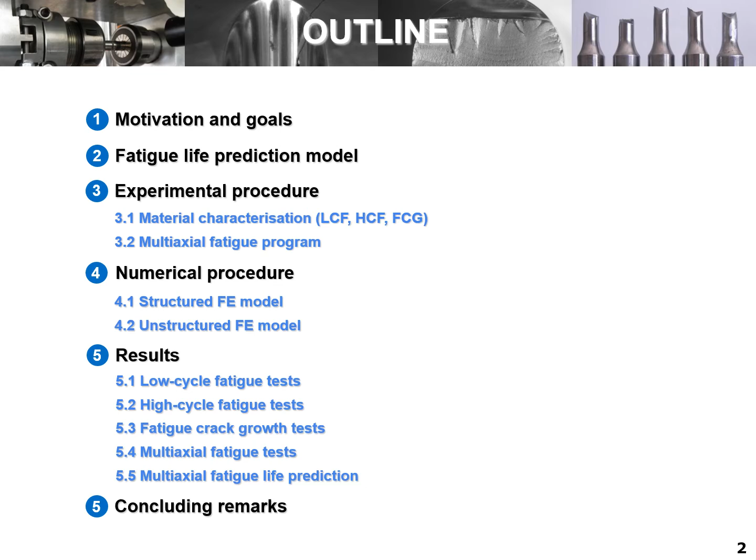Additive manufacturing has received a great deal of attention over the last years because it can meet the current demands of modern industry, in particular the possibility of creating three-dimensional objects directly from digital files, or the geometric freedom, among others. Within this group of techniques, selective laser melting is currently one of the most popular processes and has been successfully used in different sectors, namely aerospace, automotive, biomedical, and mold industries.

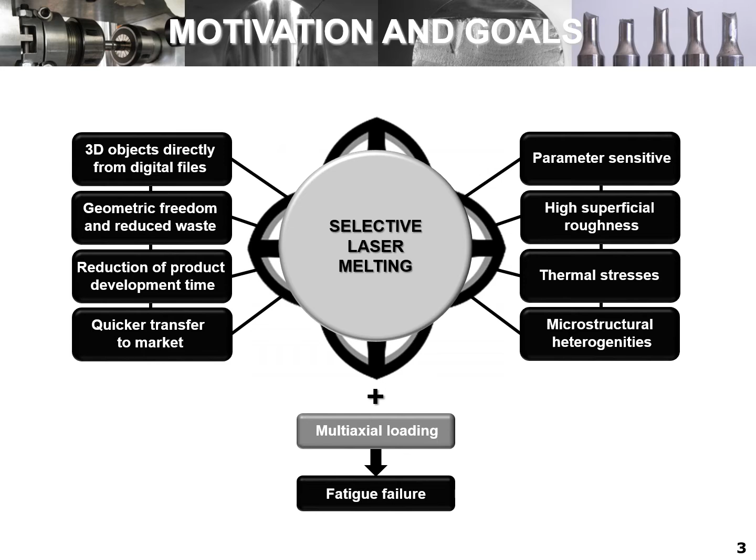Nevertheless, this technique is rather complex. Products are parameter sensitive and are very prone to microstructural heterogeneities, such as unmelted particles, cavities, pores, contaminations, etc. In the presence of cyclic loading, in some cases with a multiaxial nature, the SLM parts are susceptible to fatigue failure.

Briefly, multiaxial fatigue models can be organized into stress-based, strain-based, and energy-based approaches. Regarding the notch effect, it is generally accounted for using the theory of critical distances, the strain energy density concept, or fracture mechanics.

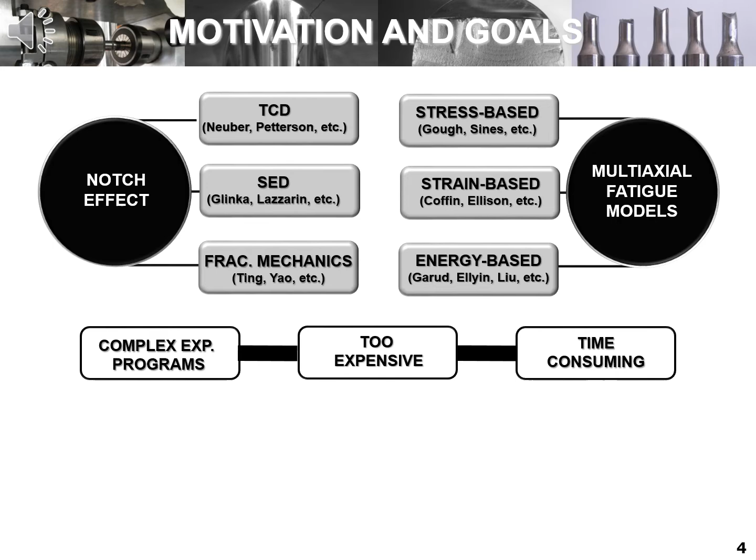The most sophisticated models generally require extensive experimental programs and complex computational simulations, which makes the process too expensive and time-consuming in most cases. Our proposal aims to solve these drawbacks. In this study, we propose a simple approach based on a limited number of material constants and a rapid and unstructured finite element mesh, implemented using a linear elastic framework.

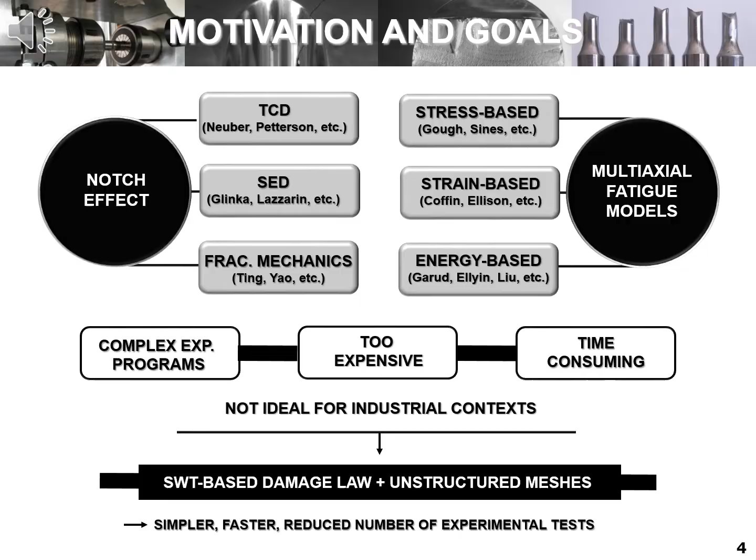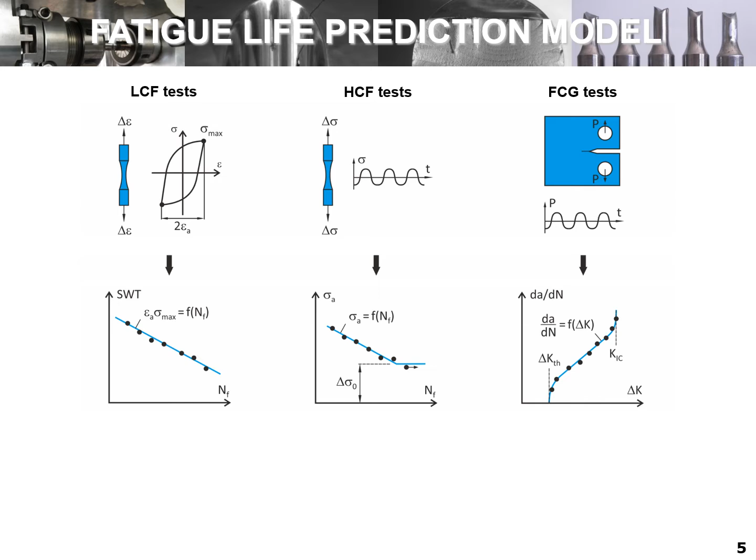As far as the fatigue life prediction model is concerned, the first step is devoted to the material characterization. As shown in this slide, we performed low cycle fatigue tests, high cycle fatigue tests, and fatigue crack growth tests. Low cycle fatigue tests allow the definition of a fatigue damage law relating the SWT parameter with the number of cycles to failure. High cycle fatigue tests and fatigue crack growth tests enable the definition of the material characteristic size.

Both the fatigue strength and the stress intensity factor range threshold are evaluated at the same stress ratio of the notched part.

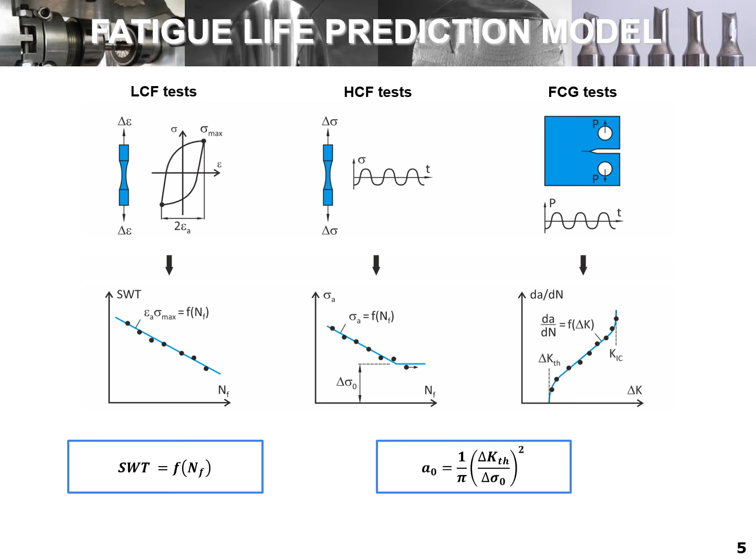The predictive model is based on two premises. First, smooth and notched samples accumulate the same damage and have the same lives if the stress-strain histories at the initiation sites are identical. Second, fatigue failure occurs when the SWT damage parameter at the initiation site reaches a critical value.

The modus operandi consists of calculating an effective value of von Mises stress range at the critical region by applying the theory of critical distances, which is used to estimate a corresponding value of the SWT damage parameter, enabling the calculation of crack initiation life using the fatigue damage law developed in the previous stage.

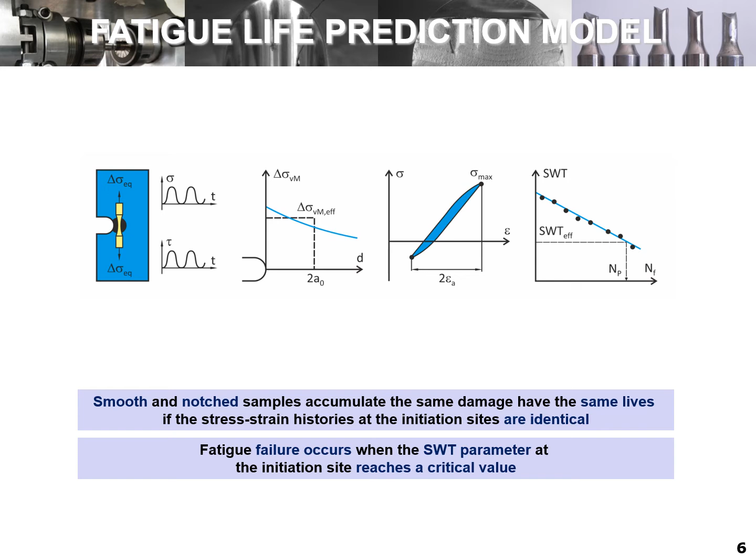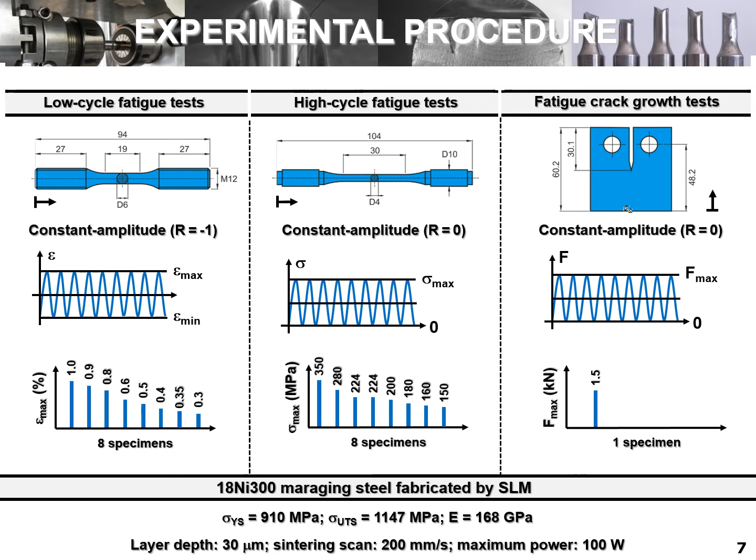In order to test the model, some experimental work is needed. We have conducted low cycle fatigue tests under fully reversed conditions for strain amplitudes between 1 and 0.3%. High cycle fatigue tests under pulsating loading conditions for maximum stresses between 350 and 150 megapascals, and fatigue crack growth tests under pulsating loading conditions for a maximum remote force of 1.5 kilonewton. All the loading scenarios and the number of specimens tested for each case are represented in the slide.

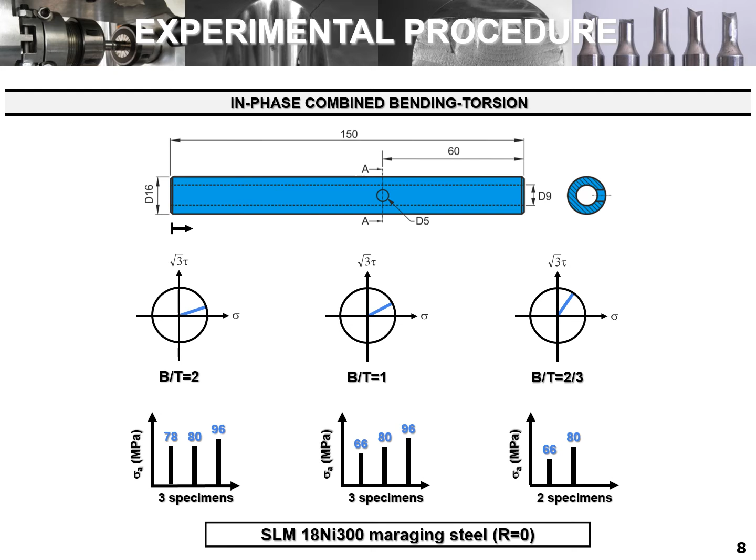As far as the multiaxial fatigue tests are concerned, the geometry selected was a hollow cylindrical specimen with a transverse hole. The tests were conducted under pulsating loading conditions for 3 different ratios of bending moment to torsion moment. The crack detection was done in situ by means of a high-resolution digital camera.

Regarding the numerical procedure, as referred to above, we have developed two independent finite element models. In both cases, it is assumed a linear elastic, isotropic, and homogeneous behavior.

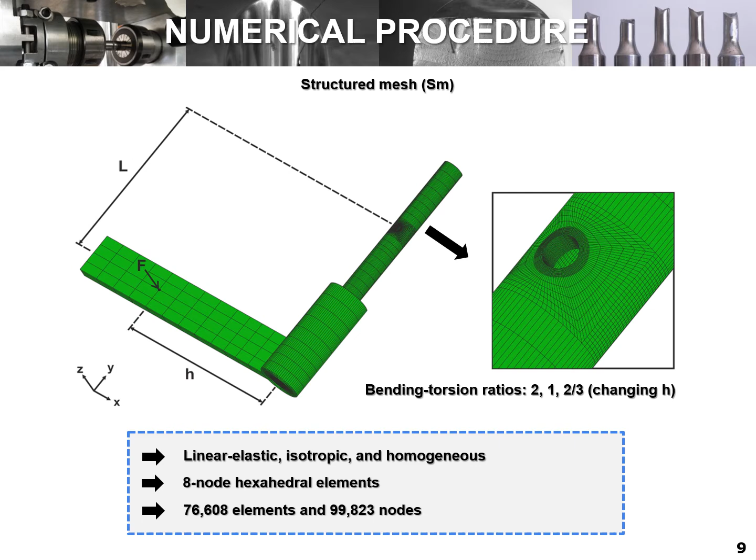In addition, we have also created a second model with an unstructured nature using 4-node tetrahedral elements. This approach avoids the time-consuming and laborious tasks associated with the development of parametric meshes, which is much more attractive to the modern industry and particularly in the context of SLM parts.

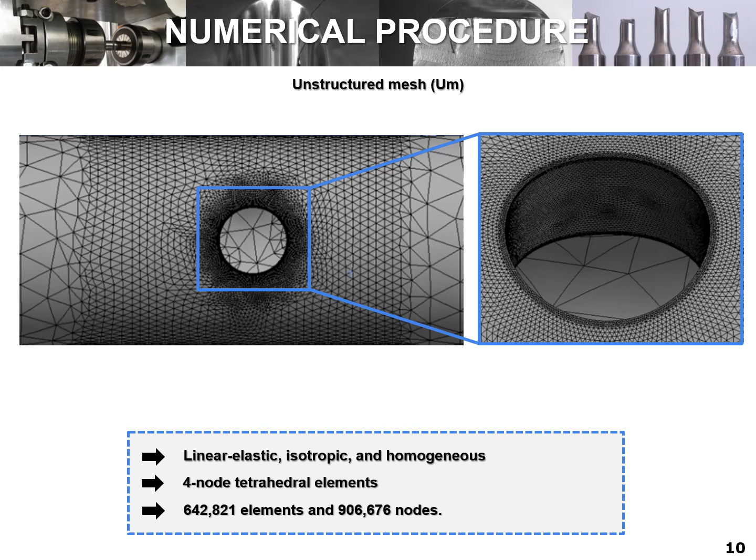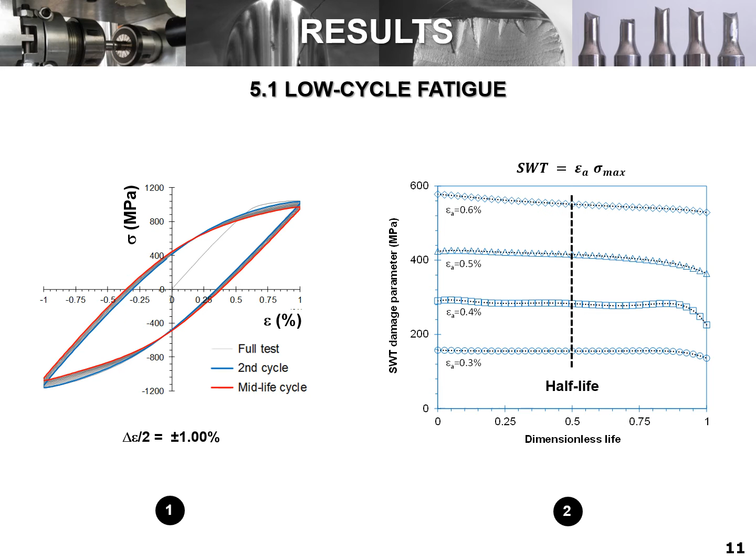The typical cyclic stress-strain response observed in the low-cycle fatigue tests is presented in Figure 1. Regardless of the strain amplitude, this alloy is characterized by a slight strain softening behavior. However, as shown in Figure 2, the SWT parameter is very stable throughout the entire lifetime. Based on this fact, the fatigue damage law representative for this material was created from the half-life cycles.

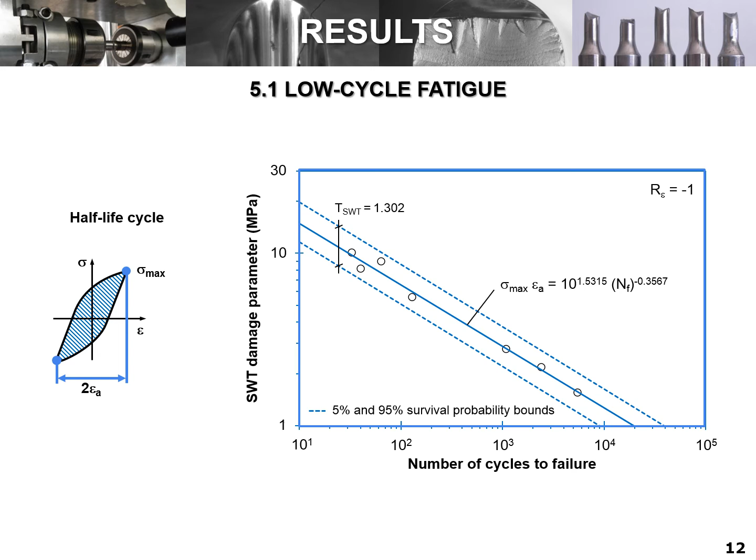Here, the fatigue limit stress was defined as the maximum value at which the specimen can endure 2 million cycles, and was equal to 266 megapascals.

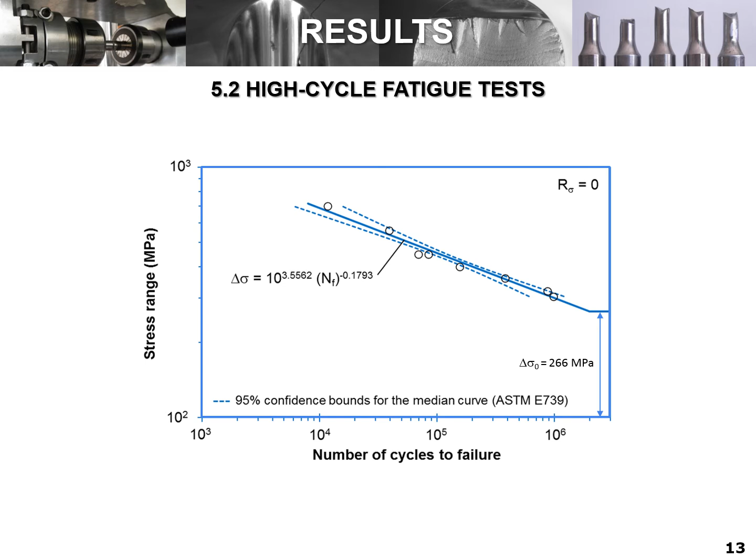Based on the previous values of the stress intensity factor range threshold and the fatigue limit stress range, we can determine the material characteristic size, A0.

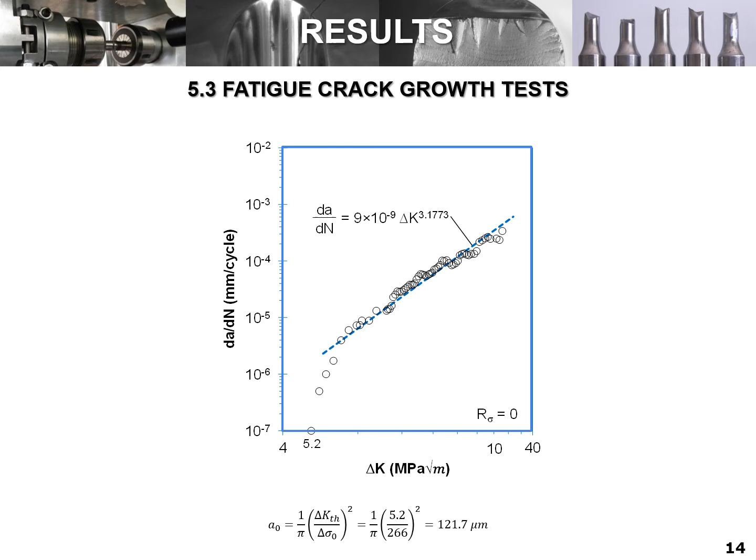The experiments show that the lower the BT ratio, the higher the beta angles. This can be explained by the greater shear stress levels associated with the decreasing BT ratios. Numerical simulations confirm these trends.

Moreover, the quality of predictions are not much affected by the type of finite element mesh used in the calculations. No significant differences are observed.

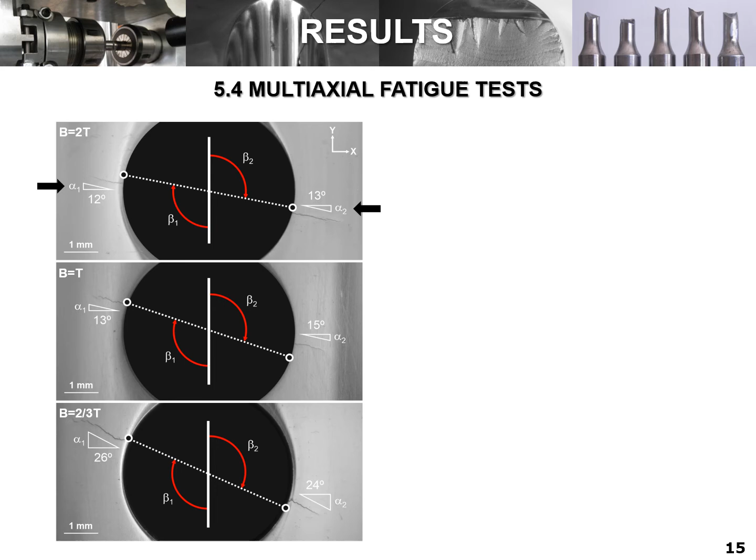Angles were successfully predicted by accounting for the first principal direction at the crack initiation site, that is, at the node of the hole contour with maximum value of the first principal stress. The comparison between the experimental observations and the predicted value shows a good correlation. In general, the maximum errors are lower than 5 degrees.

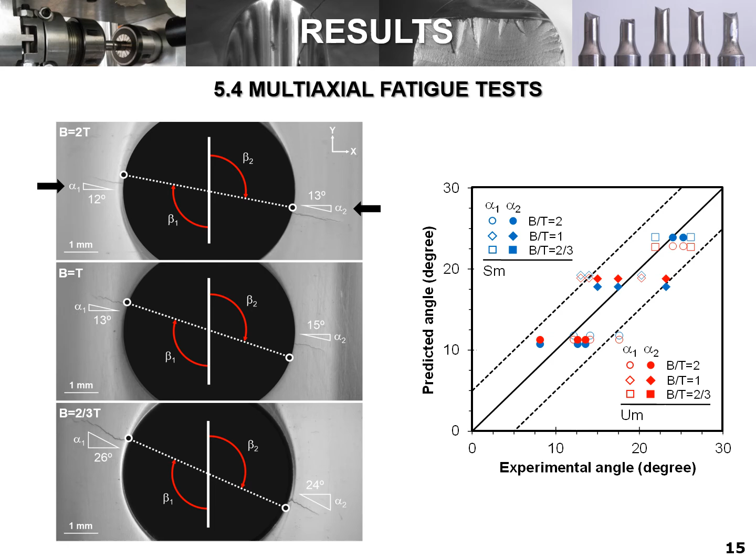The results are not particularly affected by the type of finite element mesh used in the calculations, which is an important outcome. Fracture surfaces, as expected, are also affected by the BT ratio. As we can see, they tend to be flatter for lower levels of shear stress.

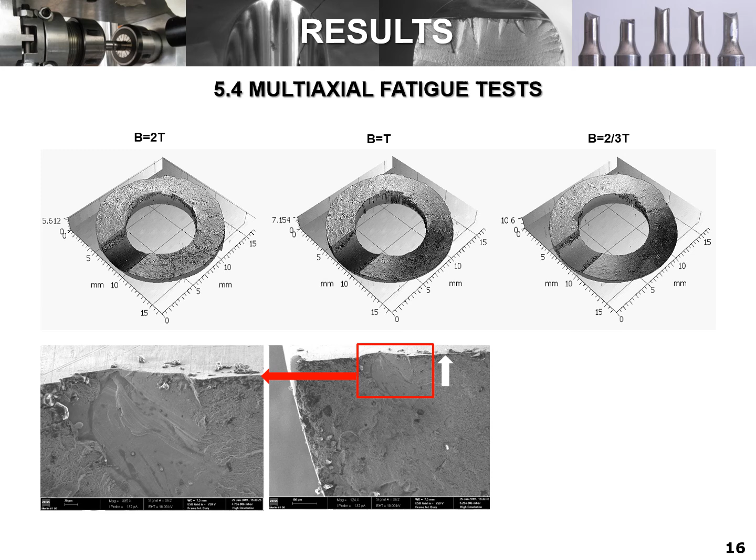Examination of the fracture surfaces by scanning electron microscopy suggests that unmelted regions were the main source of crack initiation. It is also clear from the micrographs that fatigue crack initiation sites are located at the hole surface, near the outer diameter of the specimen.

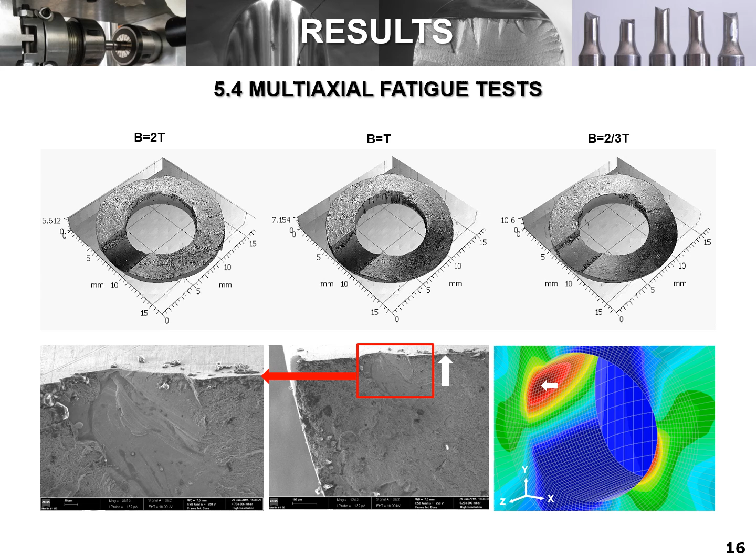These points are close to those predicted by the finite element simulations, shown by white arrows, based on the node with maximum value of the first principal stress, as suggested before.

The experimental fatigue lives were determined from the a-N curves. Since the fatigue process encompasses the initiation and growth of 2 cracks, 2 a-N curves were obtained for each test. In the figure, we can see the curves obtained for the first crack to appear in the specimen.

The data, regardless of the bending-torsion ratio and the nominal stress amplitude, were successfully fitted by exponential functions, represented by the dashed lines.

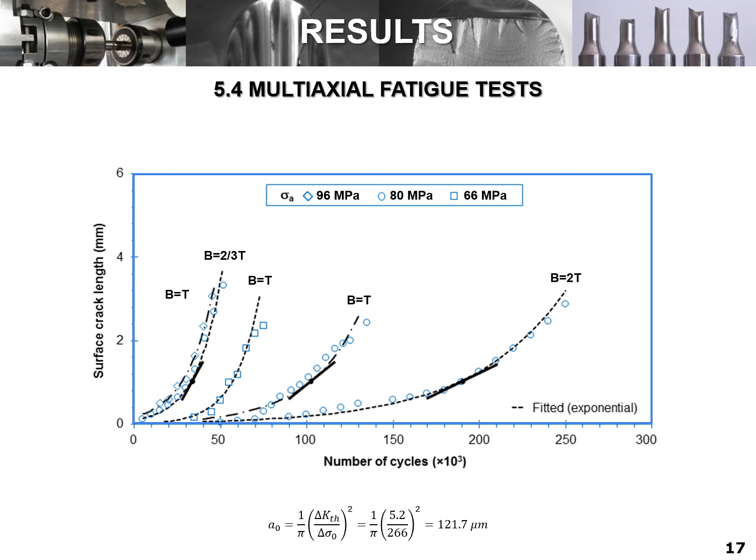Using these curves, we calculated the number of cycles to crack initiation, assuming a crack length equal to the material characteristic size. After the calculation of the experimental lives, we can test the predictive capabilities of the proposed method.

The first step, as represented, is the reduction of the multiaxial stress state to an equivalent uniaxial state. This step was done via the equivalent von Mises stress range.

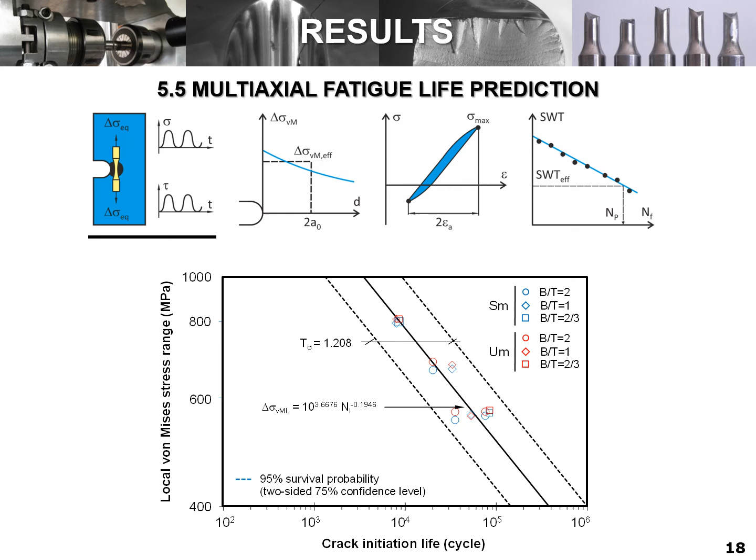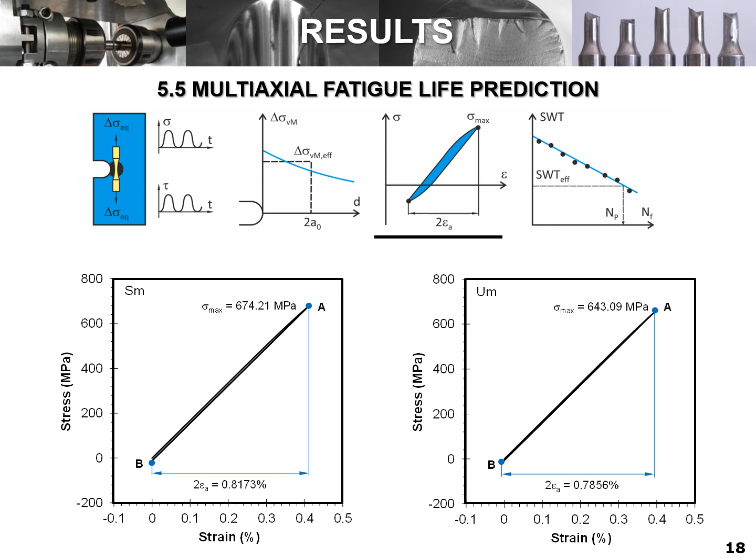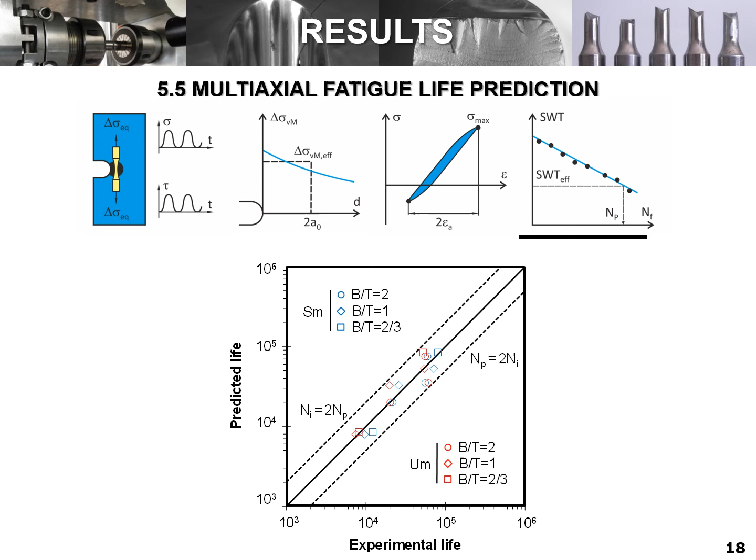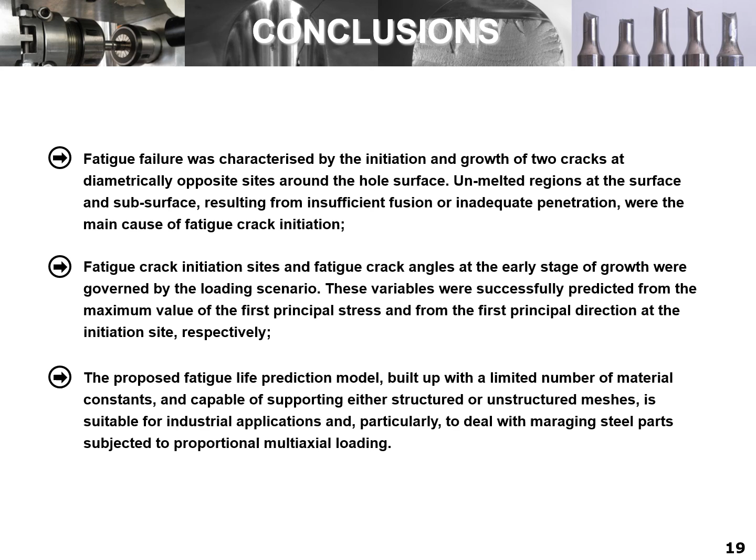These variables were successfully predicted from the maximum value of the first principal stress and from the first principal direction at the initiation site, respectively. 3. The proposed fatigue life prediction model, built up with a limited number of material constants and capable of supporting either structured or unstructured meshes, is suitable for industrial applications and particularly to deal with maraging steel parts subjected to proportional multiaxial loading. Thank you.